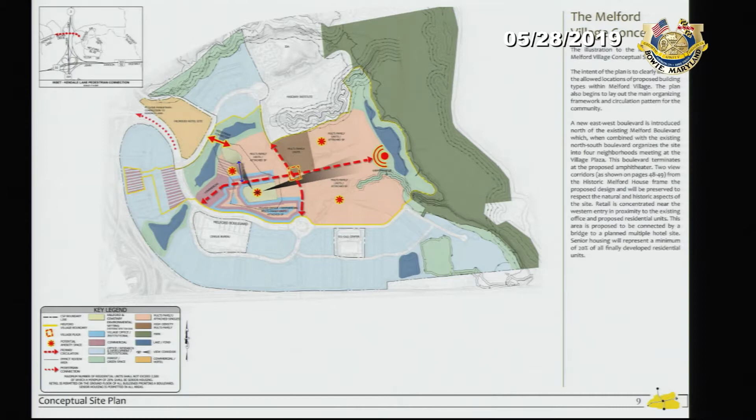The main element tonight is the Melford Mansions. Again, this is an illustrative site plan approved with the preliminary plan of subdivision in 2017. We only show it for reference, to show how this development pattern has been well conceived and consistent throughout the entitlement history of this project.

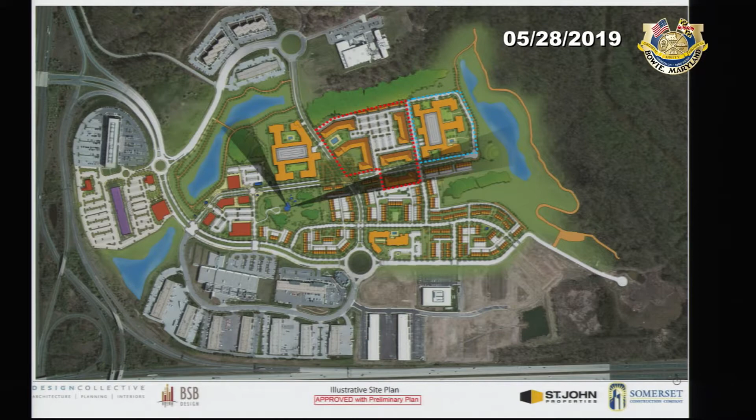Again, what's highlighted here is the area of the Melford Mansions. Moving to this slide, this is the black and white plain infrastructure plan for the building all the way to the east. Again, there's no building proposed except a footprint, some rough grading, some utilities, and some stormwater management installation.

You may ask, why are we showing infrastructure only if we don't have a building? It really is an economy of scale. If we're out mobilizing for the Melford Mansion portion to the west, it makes sense to go out and complete some of this infrastructure in one fell swoop. So we're showing that right now.

Ultimately, that would support a building for up to 472 dwelling units with internal parking. It'd be a multi-story building, and the architecture of that will come forth in a future detailed site plan application, which will go through a similar process as tonight.

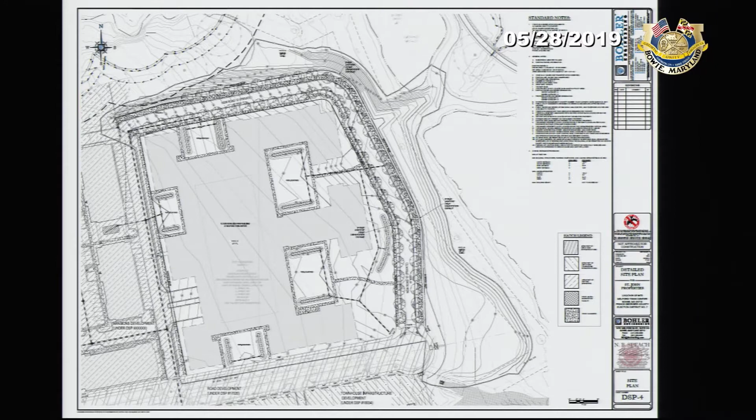So, without further ado, I want to get to the heart of the presentation, which is the Melford Mansion. I'm going to ask Fike to come up. He's the architect on the project, and will go over the details, the architecture and various elements of the Melford Mansion buildings. Thank you, and after this we'll entertain any questions. Appreciate your attention, thank you.

Right, thank you. Good evening. My name is Fike Tuckberg. I'm an architect with the Architects Collaborative Architecture and Planning Office out of Bethesda, Maryland. I'm thrilled to be here this evening making this presentation for you. We've been working on it for a while. I hope you like our presentation as well as the content.

Rob took you through it, so you know which site it is. I'm going to move on to a larger site plan so we can talk about it more clearly. The highlights of the presentation tonight are bounded by Lake Melford Avenue and Curie Drive, and north is up on this drawing, fortunately.

So we're looking at 9 residential buildings, or multifamily villa concept as we'd like to call them. We also have a community center. To give you some statistics, there are a total of 435 units and 721 parking spaces.

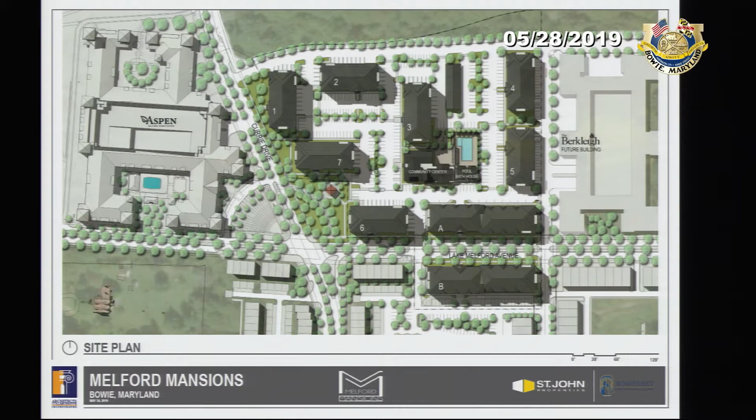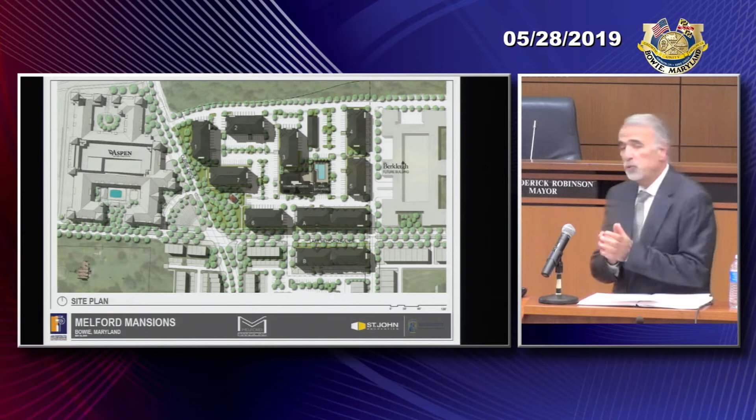We placed our community center roughly in the center of the site. To get there, you're basically getting on Lake Melford Avenue, and then you make a quick left, and the focal point of that street is the entrance to the community center, which I will show you more slides of as I advance through the presentation.

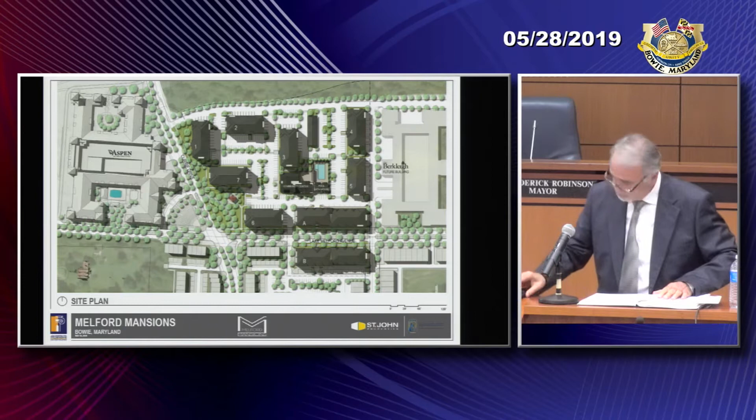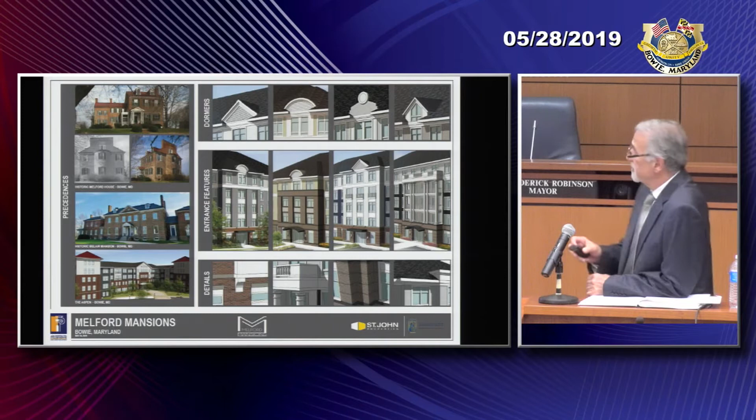But as a more subconscious reference, such as dormers. We have a series of different entrances that we provided, and there are a number of other elements there, such as bay windows, balustraded railings, brackets that support the bay windows, and punched windows. I'm going to talk a little bit more about the classicist functions of the facade as I go through the presentation.

Our intent was to develop a community where no building matches another one. And if you're standing in one of the 2.5 courtyards, or 3 courtyards, you will never see the identical view.

You will be surrounded by totally different buildings, hopefully inspiring the notion that you are in a community with variety of buildings, not sort of buildings that are stamped. So we numbered the buildings 1 through 7, the smaller buildings, and then the big ones are A and B.

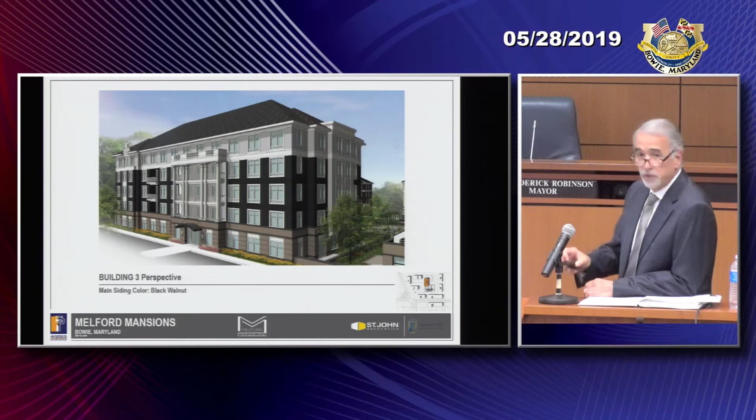These are elevator buildings, as I mentioned, which is an important part. You have your mail room inside the lobby, etc. So they do come with certain amenities. Building number 4 - again, each building we treat it differently depending on how many stories are above grade.

We adjusted the proportions accordingly, and we used that selection of elements I presented up front in a sparing, judicious manner. Building number 6, number 7, and then you come to building A.

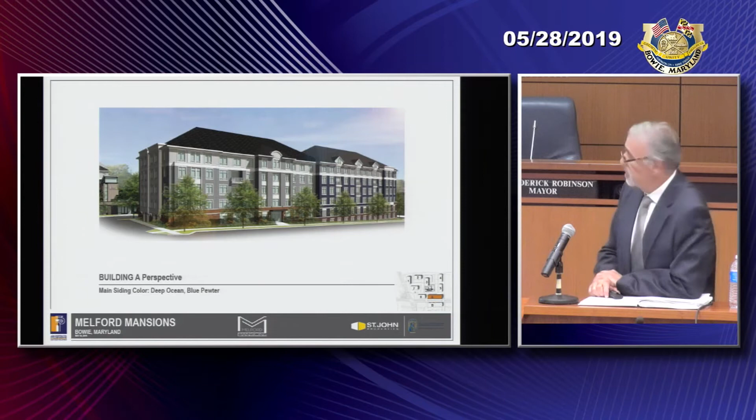Building A and B front Melford Mansion Avenue, and those are longer buildings. Part of the requirement was to have 70% frontage. I think we have accomplished that and sort of exceeded it. I wanted to make sure to break this building up also so that no building on the site is going to be perceived as a large building.

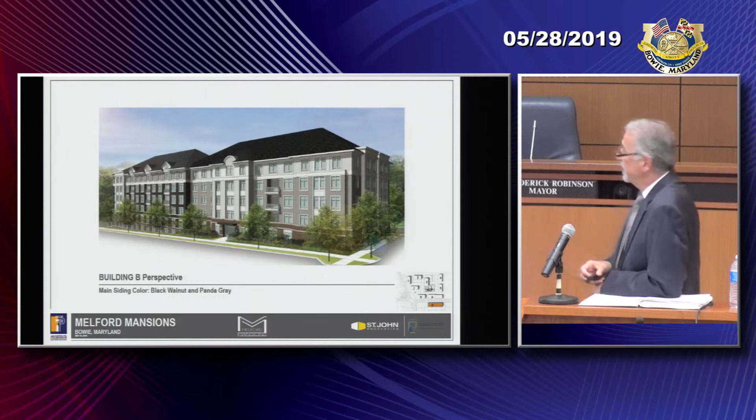And this building B - again, the same thing applies to this building. And then, sort of our pride and joy, we're planning a fantastic community center. Our intent is to be very complementary in the use of materials, both to the historical references I mentioned, as well as to fit within our own community.

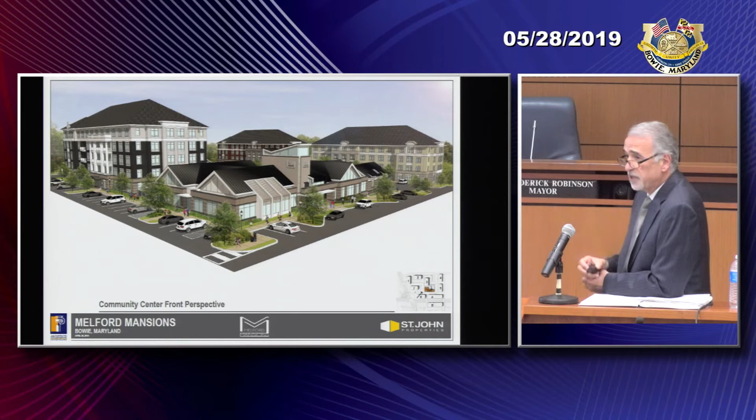But we've created much taller ceilings - the use of material, although the material is the same, is slightly different. We've added some other accoutrements and accessories. We have the tower, as you can see, that will be aligned with the entry drive into the development, into this community. And then there is a drop-off in front, as well as some guest parking spaces where you can park for a few minutes to get a guest parking pass.

Within this, we have a fantastic great room with a lot of amenities. We have a very large exercise room, which will have state-of-the-art exercise equipment. And then we have a series of outdoor amenities. We would like to make sure that everybody in this community has everything they really need so that we can keep them there, and I think the best resident is one you can keep long term and keep happy.

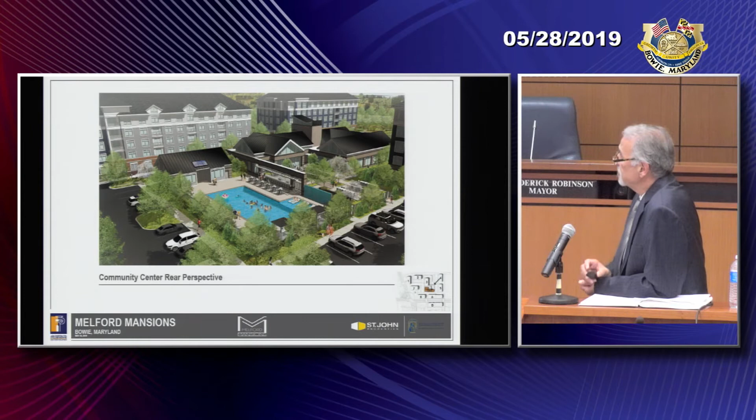We have an outdoor pool. The smaller structure you see to the left side is the bathhouse - everybody has to come through the bathhouse. Then we have a separation glass screen wall with two bars across from each other, a few cabanas, and then an outdoor space that is available year-round.

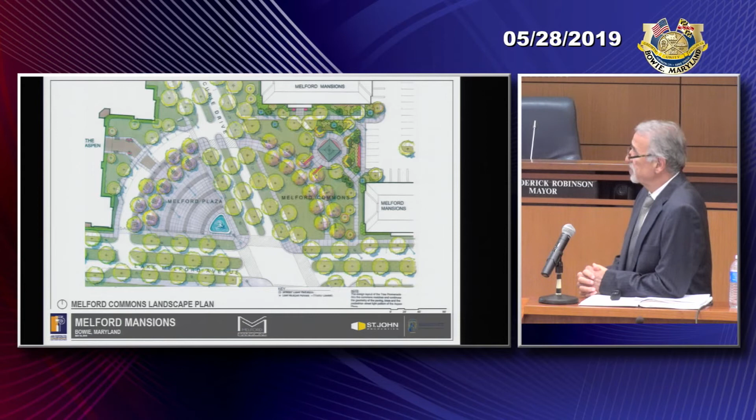So I'm back to the plaza. This plaza was planned before me, but we're carrying through everything that was promised. The left side of the plaza is being developed with part of the Aspen building, and that plaza was planned as a more civic hard surface plaza with some trees, but not as much as the one on our side of the street, which I like.

They set a great contrast to each other. One side is kind of a civic gathering place. The other side is a little bit more green, more pastoral, and it transitions much better into our residential community.

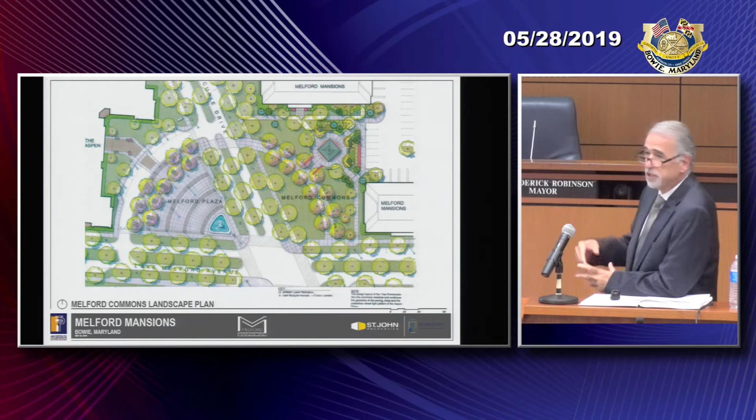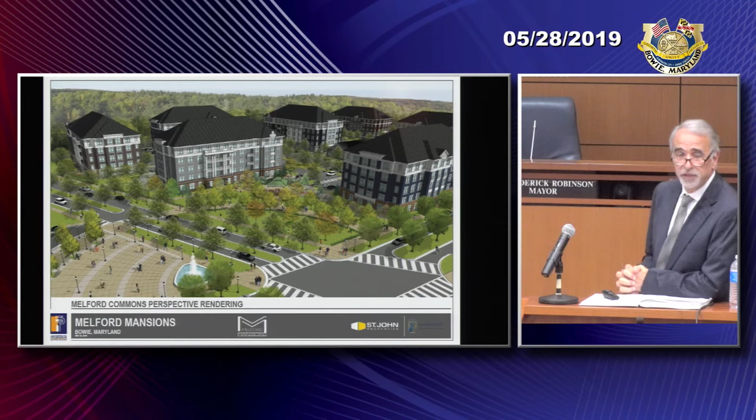There's a gazebo, so it's a more contemplative area rather than a large gathering space. And finally, this is the vision we have for this community. We wanted to make sure all the buildings are well formed and selected, especially looking at this plaza, and we used premium colors and entrance architectural features in this area. We'd like to make sure the entrance to the community, to Melford Mansion Avenue, as well as the Curie Drive facade, is very well treated and respected. So with that, I conclude my presentation. Happy to answer questions.

So thank you for that.

I failed to mention this, but the aggregate of these buildings is approximately 435 multifamily units. These buildings also have surface parking, a combination of surface and structured parking. On the first floor, there are pull-in garages for individual units on some of the smaller buildings. The larger building, which looks like two buildings put together, actually has a drive-in first level podium type parking arrangement with a common point of ingress and egress, supplemented by surface parking shown around the buildings themselves.

Overall, we're excited about the opportunity to continue with the entitlement process and move forward, as this is going to be an important component of the overall mix of uses at the Melford Town Center. So we've done all the talking tonight, so I'd like to open it up to the floor for any questions related to this application or these applications. We're happy to answer anything you might have.

I think the buildings look very nice. My question is, though, I think there was a case or court hearing that had to do with the master plan and the general plan as to which one applied to the project. Are you going to start building these before the court makes a decision on that?